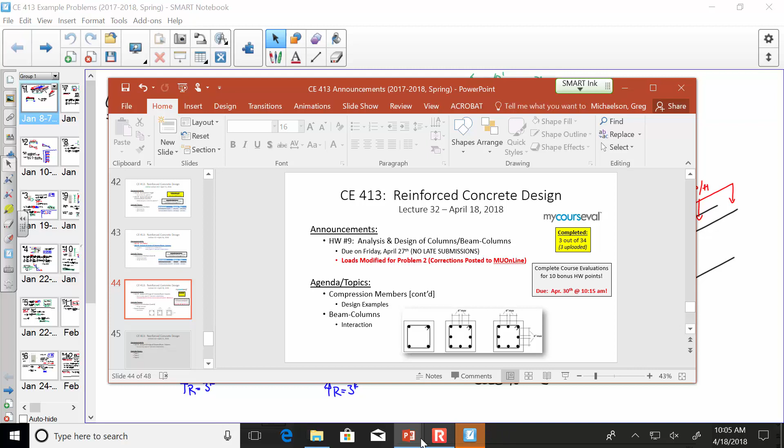Okay, so let's get into column design, because this is really simple. It's not that complicated. It's probably one of the simplest designs that we will do throughout our reinforced concrete design course, period. Column design is pretty straightforward.

So first off, you determine the load on a column. That's 1.2 dead plus 1.6 live.

Let's also clarify something else. Let's make sure we tie this into the real world. I want to look at this column right here in the room. So think about this: this column is going to be responsible for the tributary area—halfway over to this column, halfway over to that column, and then halfway over to the adjacent column this way.

So if there's some 80 pounds per square foot dead load and 100 pounds per square foot live load, whatever it is, take that pressure load, multiply it by the tributary area for that column. That gives you a dead load, that gives you a live load, factor it to get your Pu. Everybody okay with that? I had a feeling by now that that's pretty clear, but I wanted to make sure everybody was okay on that.

Now, once you've got your design load, you have to choose a reinforcement ratio for the purposes of design. Obviously, you've got to choose a value between 0.01 and 0.08. A good starting value, if you're not told, is 0.02. That's a pretty nice value for estimation purposes.

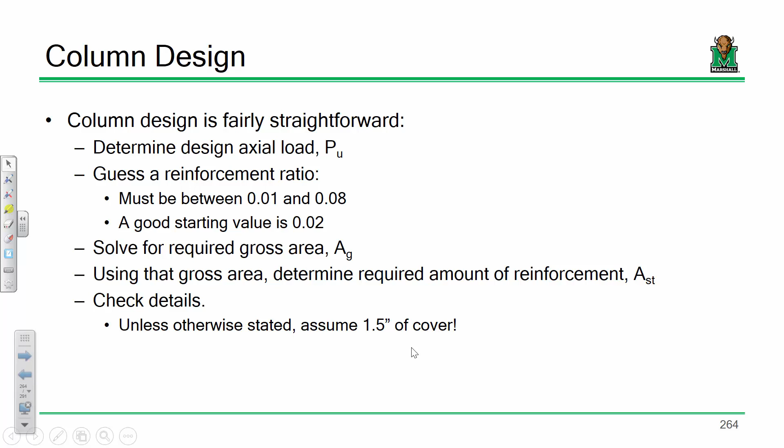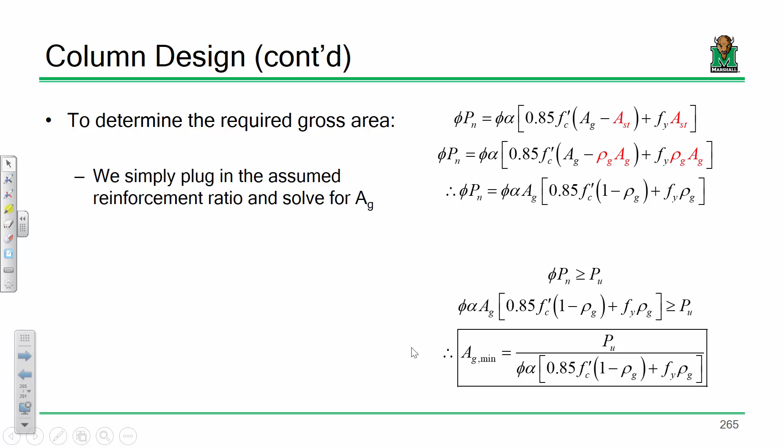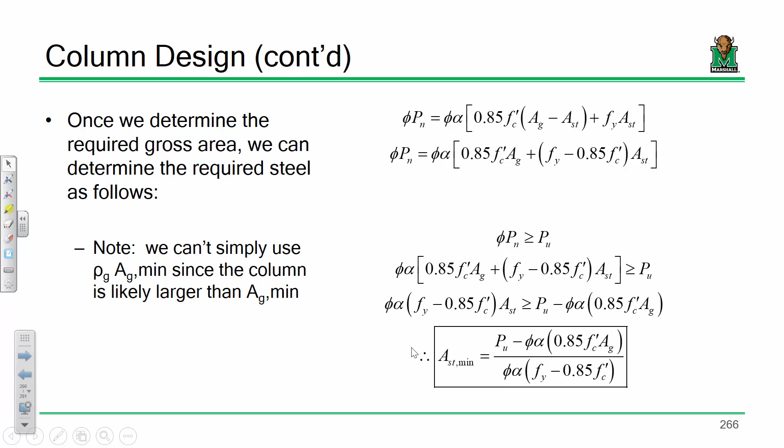Now to solve for the gross area, once we've assumed our reinforcement ratio—remember this is just an assumption—we plug and chug and solve for the area, and here's what we get. Maybe another way of thinking of this is the gross area requirement is really just to get you in the ballpark, to figure out about how big your column size is going to be. You as the engineer are allowed to tweak this value a little bit, because you're going to take the actual gross area and do another algebraic substitution to figure out what the required steel is. Everybody okay with that? Don't worry, we've got a couple examples where we're going to clarify that.

Speaking of, here's our examples. I think when we go through this, you're going to go, oh, this actually was pretty simple. We're going to design two columns: a square column and a circular column.

Let's design a square-tied column, and I'm making a point to say it's square-tied so you know what your phi value and alpha value are. Let's design a square-tied column to support an axial dead load of 130 kips and an axial live load of 180 kips. We're going to begin by using approximately 2% steel, a concrete strength of 4,000 psi, and grade 60 steel, so we know Fy and Fu. I think you're going to find, when it's all said and done, yeah, this actually was pretty simple.

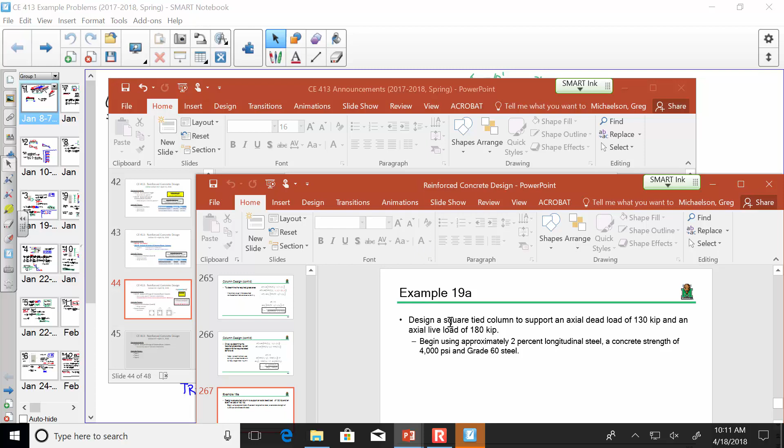Column—well, let's just do this. All right, so F'c is 4 ksi. Now Fy, it's grade 60 steel, so what's Fy?

All right, now we're starting off with a rho value, and I'm going to say it's a rho value of about 0.02. When it's all said and done, that's probably going to change a little bit because of how we round our values and how we select rebar and so on. That'll probably get tweaked a little bit, but as long as it's between 0.01 and 0.08, we're good. And you do want that value to hug the lower bound. In the end, steel's usually a little more expensive than concrete, so if you can use more concrete and less steel, that's usually the economical way to go.

Now we have a dead load of 130 kips and a live load of 180 kips.

Now, while we're at it, this is a square-tied column, so what's our phi and alpha value going to be? 0.65 and 0.8. So phi is 0.65 and alpha is 0.80, and I'll note it's a square-tied column.

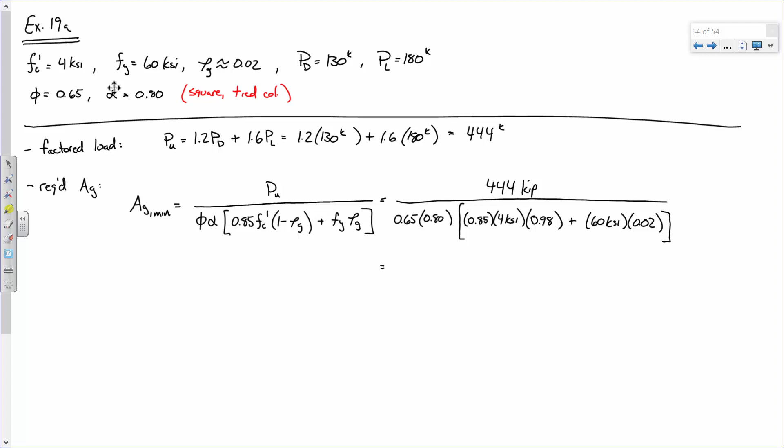We got a number for me? 137.1? That's not what I got. Say it again. 188.4? That sounds a little better. Do I have a second on that? What are the units?

Square inches. All right, so that's about how much column we need - that's about how big the column needs to be.

Now this is a square column, so how do I determine the side, like how big the side needs to be? Square root of that. That's going to be different if we're doing a circular column - we don't take the square root, because the area of a circular column is not b squared or whatever.

So b min is the square root of AG min, and that's what? Do I have a second on that?

Okay, so let's talk a little bit about column dimensions. More often than not, you like to have your columns to the nearest inch. A lot of times even the nearest 2 inches tends to be an economical decision, because especially with circular columns, you're using pre-built forms that come in various increments. You probably won't find a circular column form that's 12 3/4 inches in diameter.

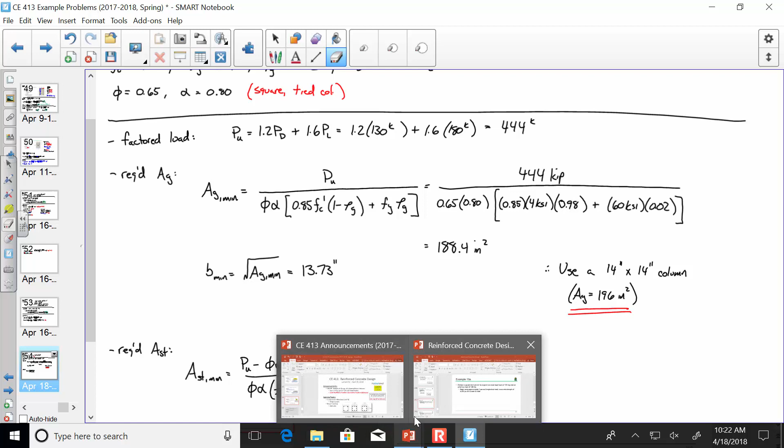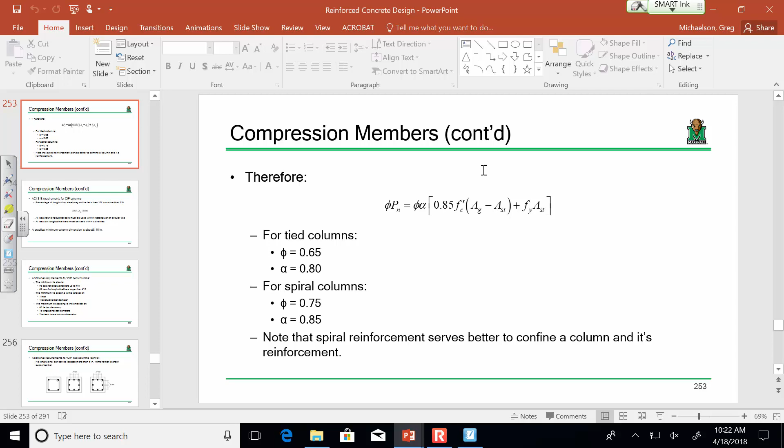Because I don't want you to feel like they're coming just out of the clear blue sky. All I'm doing with these equations is this: for this one, this AST min, all I'm doing is taking this equation and setting it equal to Pu and solving for that. So take this equation, set Pu equals all this and solve for AST. Just do a little bit of algebra and simplifying it, and that's what you're going to get. So I don't want you to think there's any magic behind these equations. There's really not. It's just a little bit of algebra.

Okay, so let's plug and chug. 444 kips minus 0.65. Now watch this, I want you to pay attention here. 0.65, 0.8, 0.85, 4 KSI, but then Ag, I'm not using the 188.4, I'm using the actual area, 196.

And then down on the bottom, 0.65, 0.80, and then we'll say 60 KSI. Actually, I need a bracket there.

So what does that come out to be? 3.12? I got 3.31. Check your parentheses, probably on the bottom, because this quantity here is in parentheses right here. Getting 3.31? Okay.

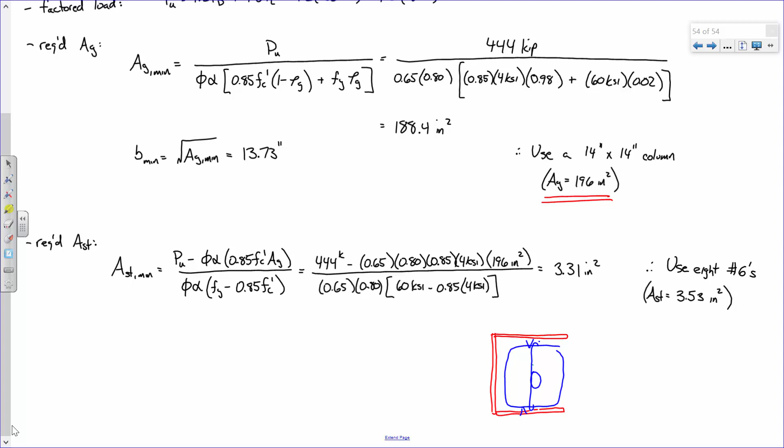Do we ever have to worry about the development length on a column? That's a good question. Do you ever have to worry about development length on a column? You do. There is a model to compute the compression, or the development length, of elements in compression.

We didn't cover it because, in the grand scheme of things, it's usually not as big of a deal as elements in tension. The development length is usually pretty short comparatively - it's tension that's the problem. But it is there. Your textbook even lists it, but it's a lot like the other development length models. It's just plug and chug, same factors, just plug and chug.

Good question. Sound good? We're not quite done with this problem because we've got tie spacing and tie selection to do. Has everybody got this? Okay, I'm going to move on to the next part of this problem - now, tie selection and spacing.

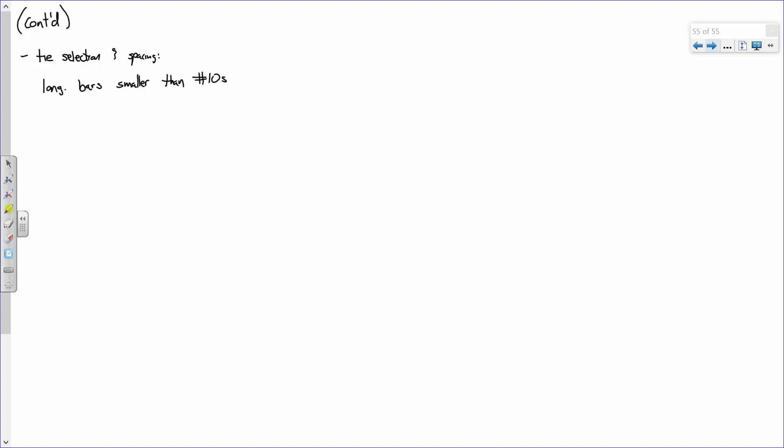First off, the longitudinal bars that we picked are smaller than a number 10. So the actual ties I'm going to use - it's common to either use a number 3 or a number 4. Because we're dealing with longitudinal bars smaller than number 10s, use number 3 ties.

So I think we've already got a lot of decisions made. We know the column is going to be 14 by 14, we know we're going to use 8 number 6s, and we know we're using number 3 ties. Now, as for spacing those ties out, you're the designer. More ties means more steel, means more money. So do you want to use the most amount of ties possible or the least amount of ties possible?

Least amount of ties possible means you care about minimum spacing or maximum spacing? Maximum - you want to space them out as far as you can. So let's check max tie spacing.

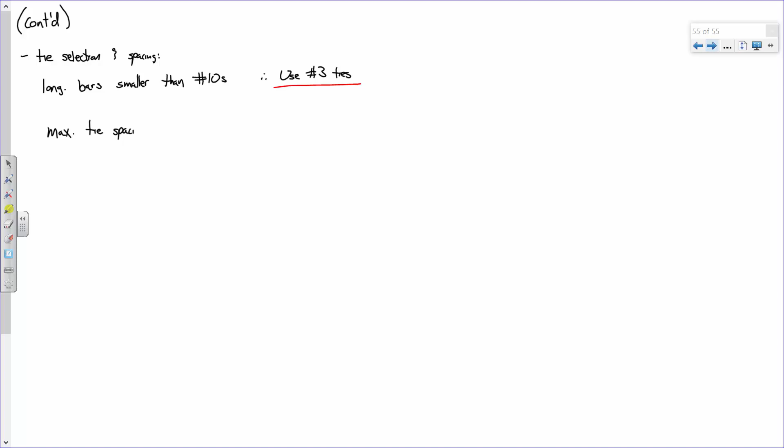Now, does anybody remember how you check max tie spacing? Remember, there's 3 values. Well, we're not there yet - we're going to get there in a sec. But I'm talking about how far apart the ties are spaced. I'll give you a hint: the first one was 48 tie bar diameters.

So that's 48 times - what's the diameter of a tie bar on this one? No, tie bar. Is everybody with me? I feel like everybody's like, what?

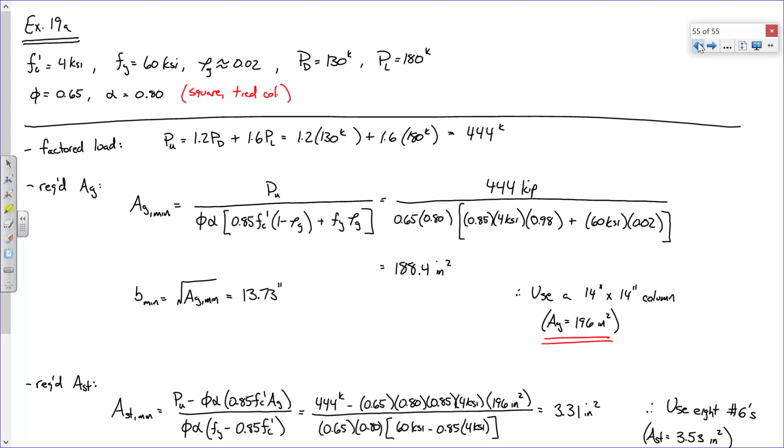Okay, we did this in a previous example, but if you recall, we had to check the minimum and maximum tie bar spacing. So we had 48 tie bar diameters. Is that always 48? Yes, these limits are the same.

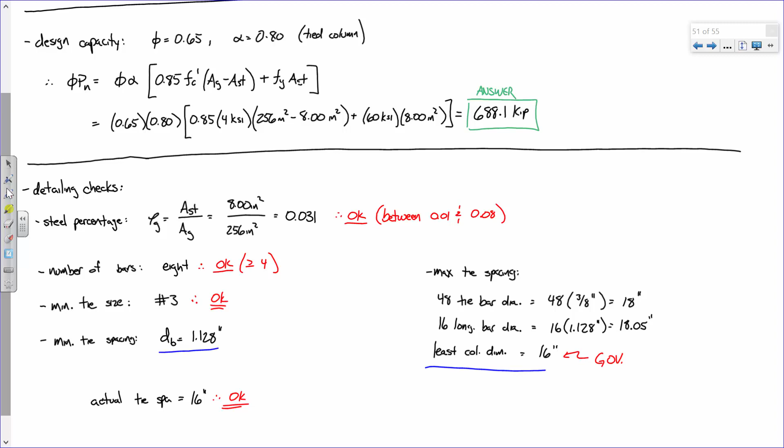I just showed it, but what's the next one? 16 longitudinal bar diameters. So 16 times - now what's the diameter of the longitudinal bars? What size bars are we using, guys? And what's the diameter of a number 6?

Somebody else, back here. Now hold on, no - for anything up to a number 8, how do you find the diameter? 6 over 8, so 3/4. Now, if it's over that, if it's a number 9, number 10, number 11, you've got to look it up. And then, what's the third one?

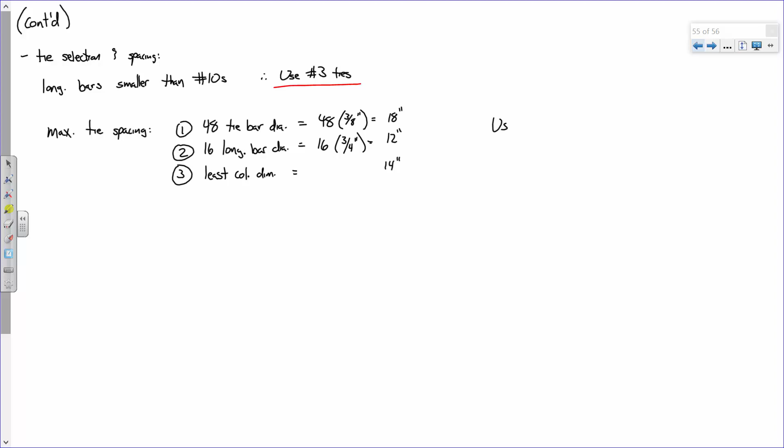The least column dimension—this column is 14 by 14, so that's just 14 inches. So we've got 14 inches here. This top one, 48 times 3/8, is this 12? This is 18, and this is 12, right? So I propose that... well, let's check, there's 2 other limits we've got to check. First off, we can use number 3 ties at what spacing? 12 inches.

So there's 2 other remaining limits to check. The first is rho G, because we assumed a value of 0.02, but we upped our areas and changed things around, so we need to check that. That's AST over AG. What is AST? 3.53, the actual area, so 3.53 square inches. And what is AG?

196. It's not the 188.4, it's the 196. Okay, and what does that come out to be? 0.018. So when it was all said and done, that changed a little bit because we changed our column size and had to up the rebar and what have you. But in the end, that's okay, right?

Okay, now let's see if we can do this in our head: clear bar spacing. Now remember, clear bar spacing, we're using 8 bars, so we do have that 6-inch limit. So what do we got? We've got 14 inches. Tell me what to do. We subtract what? 2 times the cover. We'll use 1.5 inches. Then subtract what?

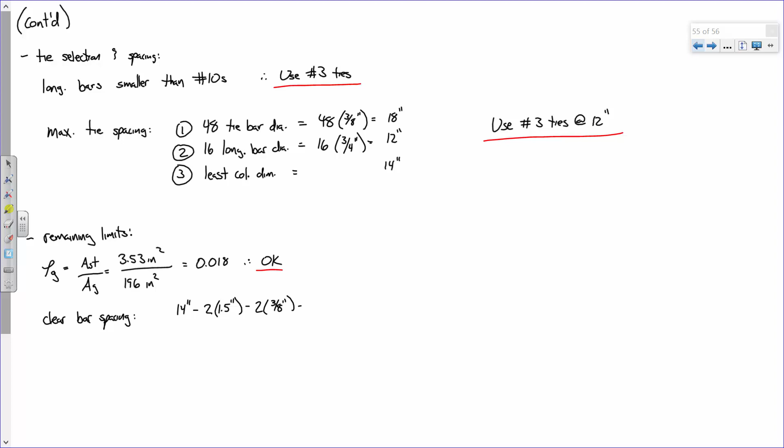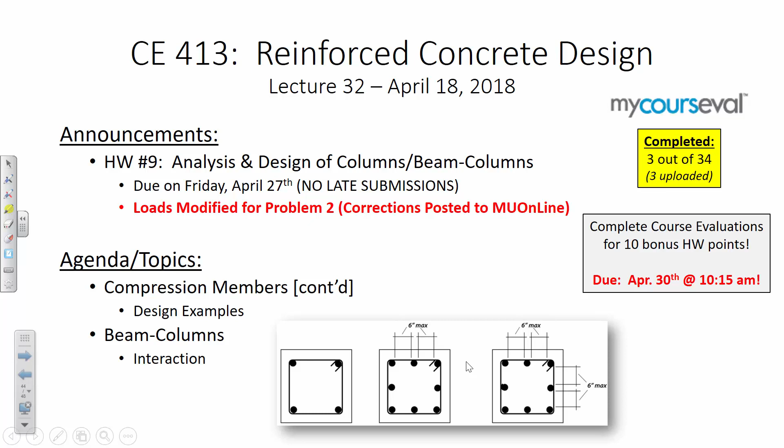We're talking about this situation right here, this is what we're talking about. So we have the column, right? We do 2 covers, 2 ties, and then 1, 2, 3 longitudinal bars, and then what do we do? Divide the whole thing by 2. So, 3 times 3/4, and that's 3. And we divide the whole thing by 2. So what does that come out to be?

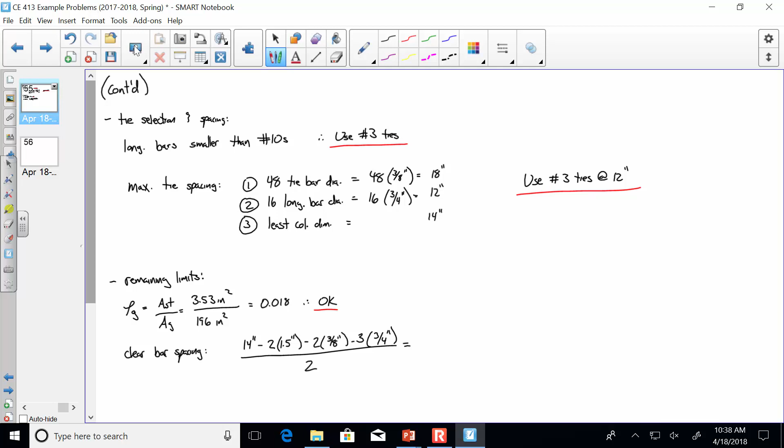4 inches. Is that good? It's got to be under 6. So therefore, here's our column.

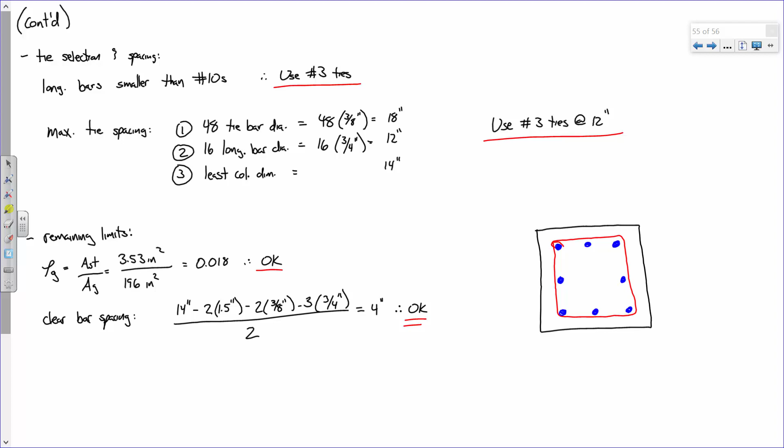So we've got 14 inches, 14 inches, 1.5 inch cover. We've got number 3s at 12 inches, and we have 8 number 6s longitudinal rebar.

What do you think? I mean, is that really that hard? Yes.

Well, that's true, but my response is don't guess a rho of 0.01. Just don't do that, because you're setting yourself up for more iteration. If you do that, you're right that you could have an actual rho that violates the limit, and then you've got to change stuff again. That's why, just for ease and as a rule of thumb—like if you've been doing this for 30 years—you'll learn don't guess 0.01. Guess a little bit higher to give yourself some wiggle room. Exactly.

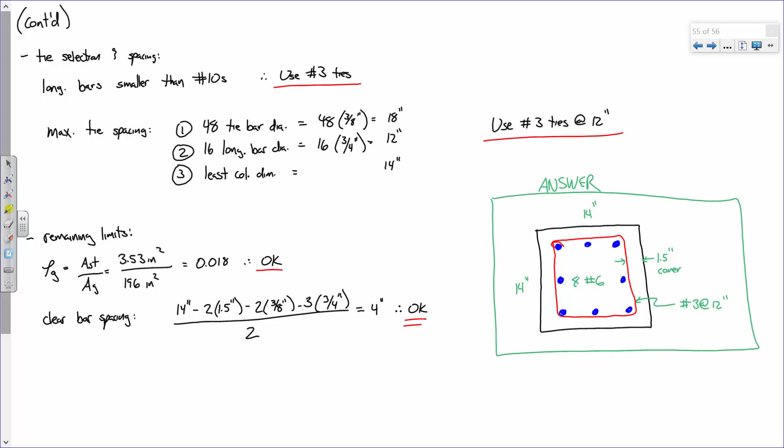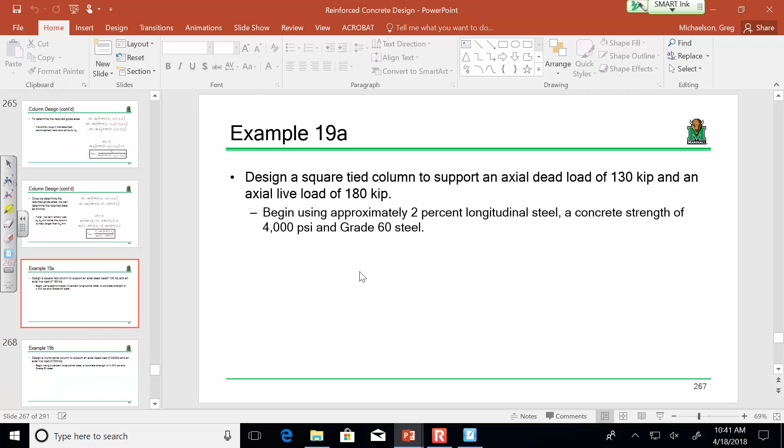What do you think? Isn't that bad, right? This is pretty simple. Let's see if we can knock out some of our remaining column design examples. This one isn't that bad, okay? So you understand this? All right, then let's look at the next example. So hold on, okay, so we just did this column. Now we're going to do this one.

So what really changed? The only thing that changed is two things. I mean, our actual problem is going to change a little bit, but from a problem description, the only two things that changed are: instead of doing a square tied column, we're doing a round, or circular, spirally reinforced column. Now, that's going to do two things to our computations. The first is it's going to change how we solve for the column's dimensions, because the area isn't b squared, it's pi over 4, b squared. So we're going to have to change that.

But what's the second thing it's going to do to our computations? Because it's round and spirally reinforced, alpha and phi are going to change—that's going to change as well. And there's a little trick on the steel, a little note I need to bring up when we get there. Second thing is that our loads changed for this problem, so that's no big deal.

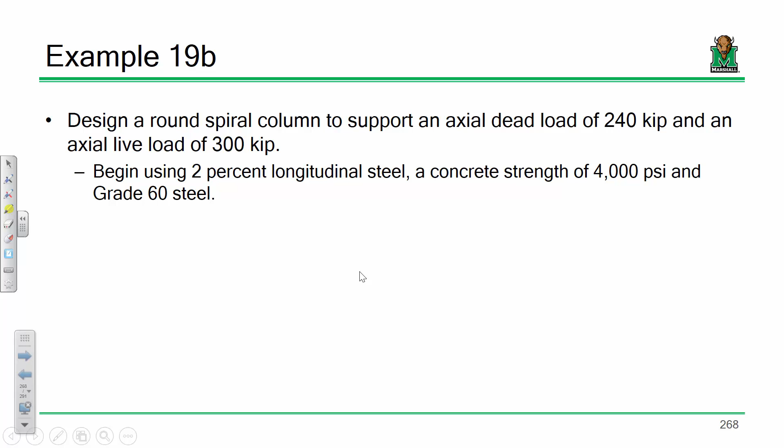Okay, all right. What happened here? Oh, there we go. Got all tangled up.

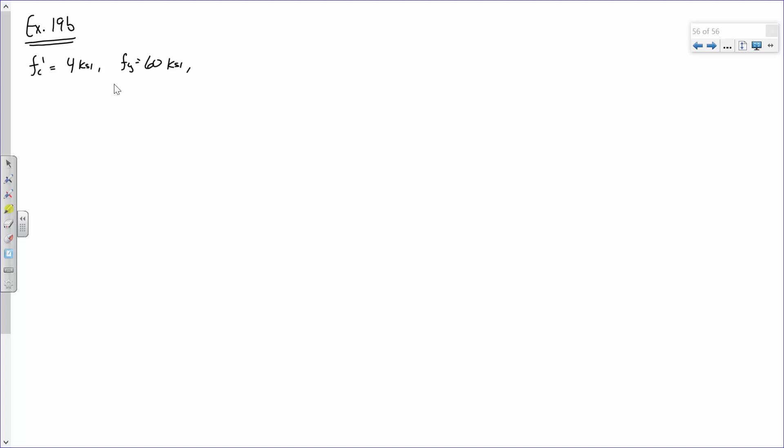Okay, so 19b, again, we've got FC prime is 4 KSI. We've got FY is 60 KSI. We've got a rho value. Again, we're going to assume a rho value of about 0.02.

We've got a dead load of 240. Is it 300? 300 kips.

Okay, so what's one other? We also know our phi value is 0.75, and our alpha is what? 0.85. There we go.

Circular and spiral. Okay, so same process as before. We start off with a factored load.

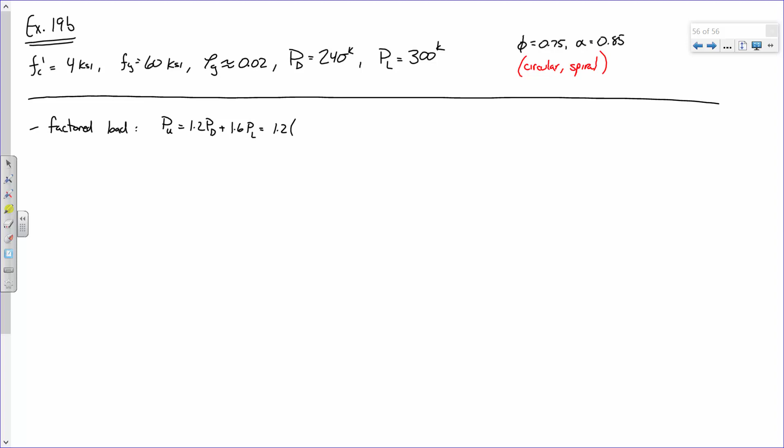So what do we got here? 768. Do I have a second on that? 768. Why did I write 7? I do, but I have the answers, but I know how to do this.

I'm trying to make sure you all know how to do this. And what if I'm wrong? I'm not, but what if I am?

All right. So, phi, alpha,

So that is, and again, make sure you get your parentheses right. So that's 0.75, 0.85, then brackets, so 0.85, 4 KSI, and then that's 0.98 plus 60 KSI times 0.02. And then that load is 768 kips.

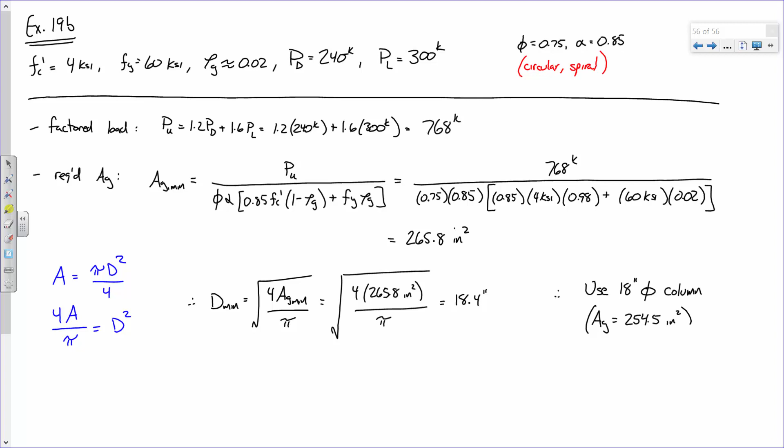All right, we're going to do the AST calc and then we'll call it. So therefore, required AST, so AST minimum equals phi alpha Fy minus 0.85 Fc prime, and then Pu

minus phi alpha 0.85 Fc prime Ag. Now I want everybody to watch this up here because I want you to see that this isn't a mistake, that this isn't a typo. Watch this. Okay? Watch the top part of the fraction. So what do we got?

Pu is 768, right? Now watch this. Minus phi of 0.75. Alpha is 0.85. But then I also have another 0.85. So that 0.85 shows up twice. That's not a mistake. That's supposed to be there. So 4 KSI and then 254.5 square inches. So I wanted you to see, like those two 0.85s, they're supposed to be there.

So on the bottom, 0.75, 0.85. Fy is 60 KSI minus 0.85, 4 KSI. That was sort of the last thing I wanted to show you, is that those two 0.85s, that's not a typo.